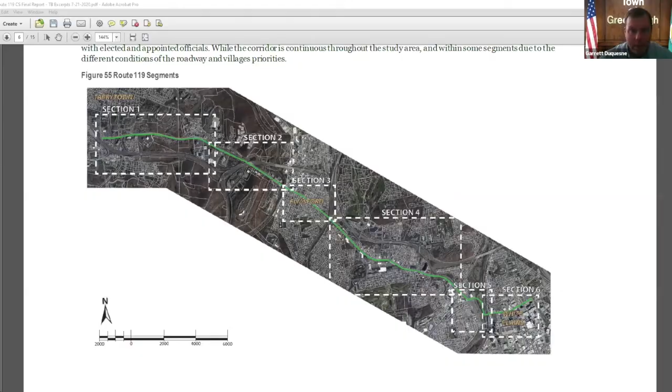Show a photo. As we all know, the Mario Cuomo Bridge—if somebody could just give me a quick shout, do you see the photo here? Oh, you do not see the photo? No, we see the map. There you go. Oh, you almost had it. Yeah, there we go. All right, great, sorry about that.

As we know, the Mario Cuomo Bridge has this fantastic shared pedestrian and bicycle path on the westbound, or northernmost span of the bridge, which brings...

You're still not sharing. Not sharing. I was sharing for a moment and then it came. There on it is. Okay, yep, right. Sorry, I'm trying to juggle a couple things here.

There we go. So as we know, this Mario Cuomo Bridge has this wonderful bike path for pedestrians and bicyclists, and it brings opportunities and challenges. Okay.

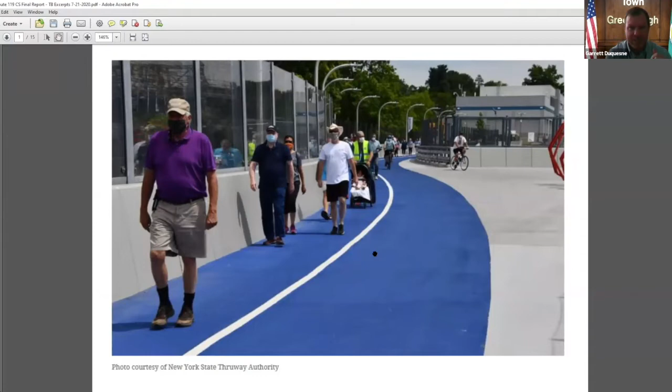That planning was focused on a 5-mile span from Route 9 in the village of Tarrytown all the way through to downtown White Plains, using what's known as a complete street concept. A complete street concept is a street or right-of-way design encompassing all users, including pedestrians, cyclists, users of automobiles, buses, etc. Over the course of 2018 and 2019, a steering committee comprised of residents from each community, including bicycle advocates and municipal officials, oversaw the process.

We oversaw the retention of a consultant named Nelson Nygaard from New York City, and ultimately the Route 119 Complete Street Design Plan was finalized at the end of last year. That report is a 136-page report with collaboration and input from the New York State Department of Transportation, Westchester County Department of Transportation, and the County Planning Department. It's available on our town website, and I'm going to walk us through a little bit of that.

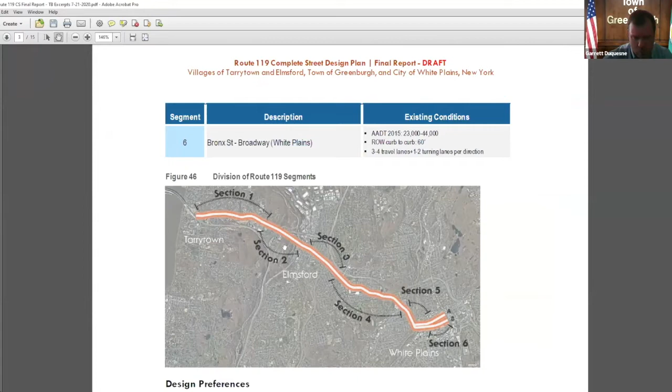We're actually going to focus on the first phase implementation. So let me bring the share screen back. Okay, when I say first phase, I'm talking about what you see on the screen now—sections 1 and 2, which span from Route 9 to the North-South County Trailway in the village of Elmsford.

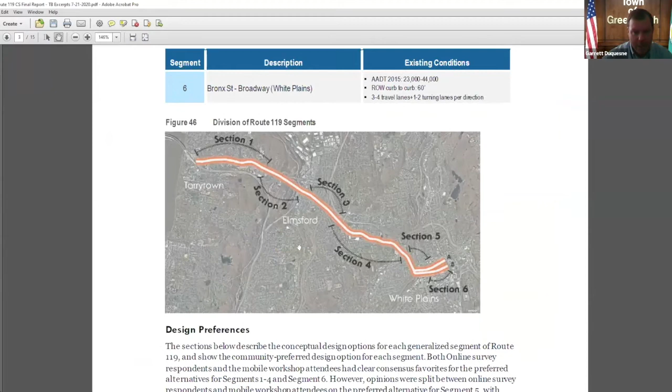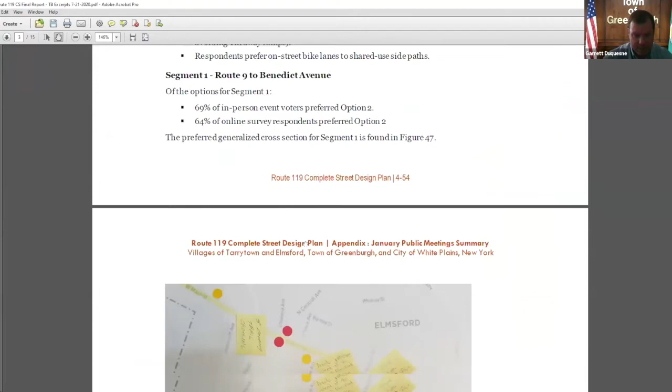In this phase one, what is envisioned is a shared and dedicated bike path on the south side of Route 119. I'm going to show another image of what that would look like.

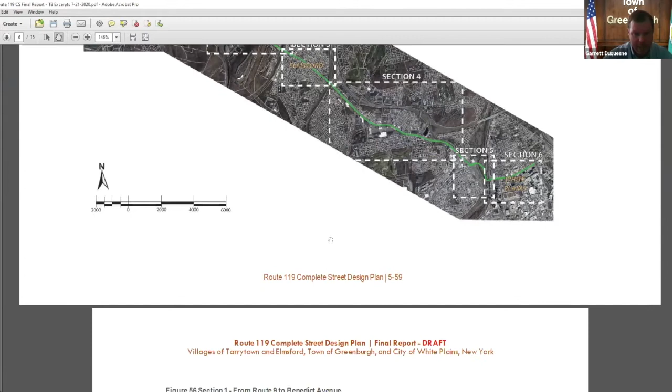What you're seeing now is some of the steering committee work. We held meetings with the consultant, and had the public come in and talk about their experiences on 119—what they liked, what they didn't like, what they thought was safe or unsafe. You see sticky notes here which they put on maps; it was very helpful to gain the public perspective. What was done was a conceptual design, and I want to show you what that means from Route 9 to the North-South County Trailway. I'm going to attempt to zoom in here.

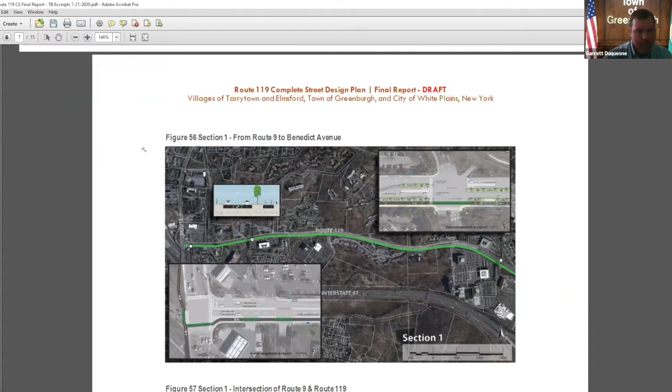What you're going to see are some concept designs of how Route 119 would be reimagined. This would be facilitated by what's called a road diet, which can be done in a variety of ways. In this instance, a lane removal would be required in some capacity, and removing that lane gives you extra space in the right of way to do what I'm about to show you.

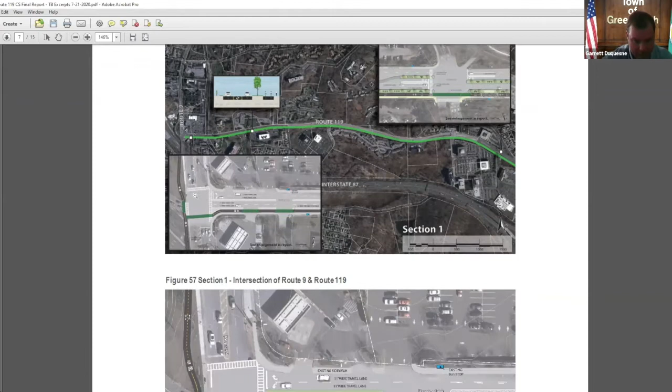As an example, I hope you have your frame of reference here. This intersection is Route 9 in the village of Tarrytown, and this is Route 119. You can see on the left that's the on-ramp to the bridge, and 87 would be down here. In this example, the road diet came into play because there are presently 3 lanes traveling westbound towards Route 9.

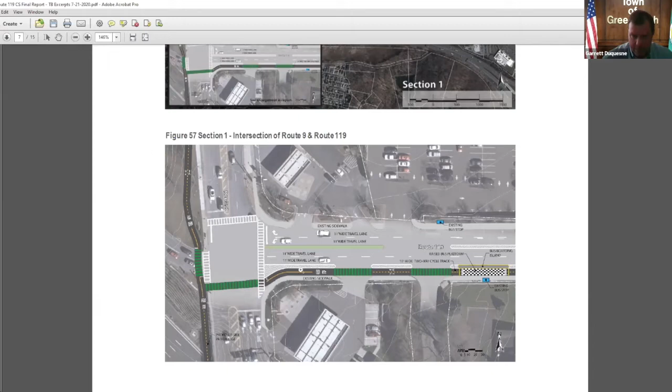The consultant has identified that the traffic capacity is such that 2 lanes would still allow the roads to function fine. What would happen is you pick up the extra space for what you see here. It looks like this cycle track. I'm going to zoom in even a little bit more.

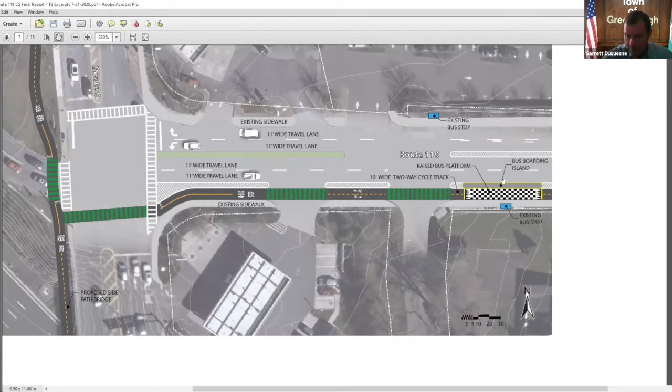You have your dedicated bike lane with 2 directions. Obviously there are driveway impediments, so there are driveway crossings to think about. It also includes a separate sidewalk, but at times it's dedicated, so there would be no interactions with cars traveling on Route 119. It can be separated by bollards, and in other examples there could be landscaping. We also had to think about things like the Westchester County Bee-Line, so there are accommodations for that.

I'm going to continue traveling east towards the town of Greenburgh. The next image is in the town of Greenburgh, close to Benedict Avenue and Route 119. So the frame of reference here would be the Stop and Shop, in the office park in the OB district. This is a continuation of that concept, reimagining Route 119.

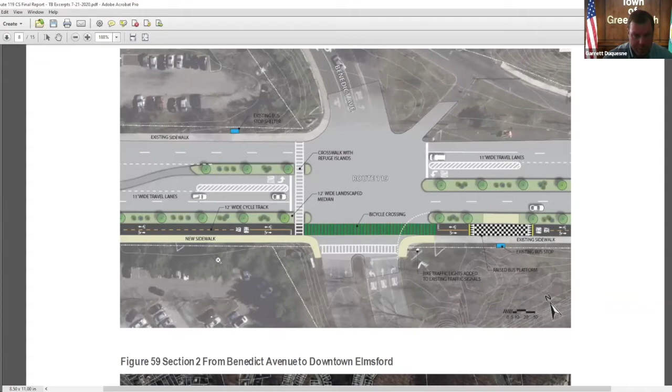If you think about what happens right now, cyclists are out there sharing the road with motorists, and it happens every day. We all hope and pray that happens without incident. But what we are envisioning here is something that would be much safer. You can get an idea of the vision here, and it really would change the flavor of this Route 119 corridor.

I'm going to continue to travel on, and now we're looking at a span of Route 119 at Taxter Road. Same concept here—you've got your bike lane, and you have accommodation for the bus.

I should mention that entailed in this process would be new signalization where you see crossings with intersecting roads. There would have to be highly identifiable light signals so that the bicyclists stop and allow all the traffic to go through. I believe there would be dedicated priority for cyclists to head across intersections, and that would be all part of the design.

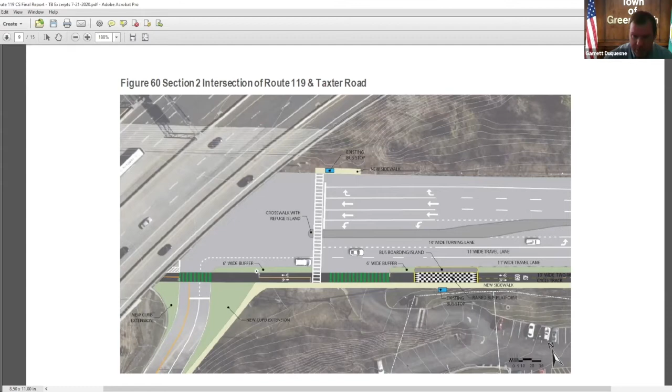Ultimately, this first phase would terminate a little bit west of Route 9A in the village of Elmsford, where the North-South County Trailway runs north-south of Route 119. As we all know, in the last year or two that was connected with a county grant. So you really start to form excellent bicycle infrastructure if something like this was implemented.

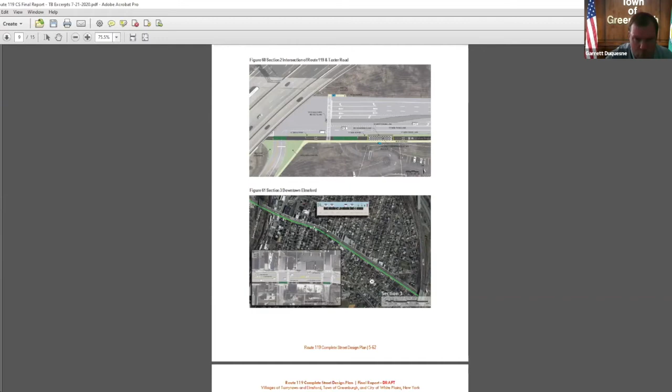So where we're at now is this Route 119 complete street study is finished. What we're seeking to do is gain the intermunicipal support from the 4 municipalities I mentioned—Tarrytown, Elmsford, the town of Greenburgh, and the city of White Plains—to support the next step. The next step is to take this design concept to actual construction plans. What that entails is, again, we would have to hire, and I say we're talking about the 4 municipalities working jointly.

We would retain the services of a surveying and engineering consultant, have the area surveyed so you can have the baseline for construction drawings. You'd have that engineer design all these lanes, design the lights in sync with New York State Department of Transportation. That's a major endeavor.

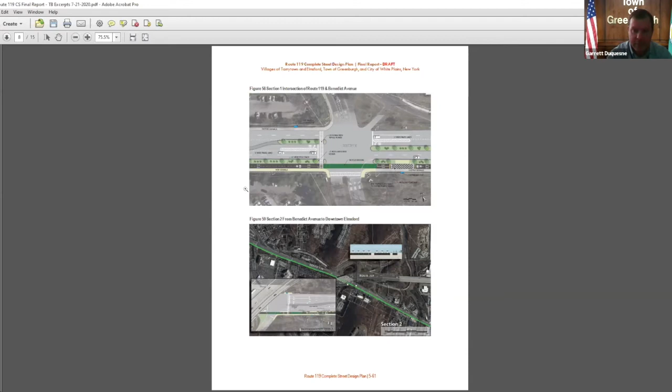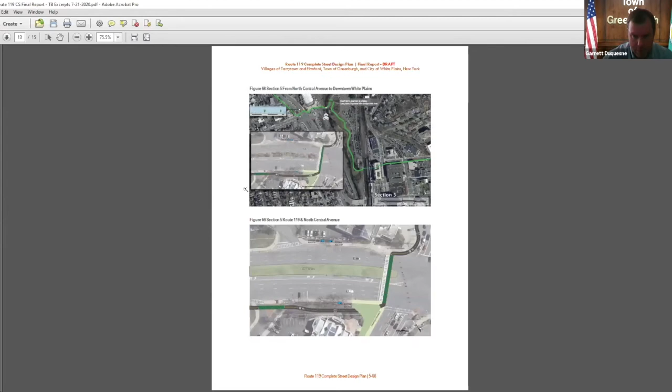Essentially what we would seek to do is obtain $600,000 in funding. I'll show you some of the funding statistics. I'm going to zoom in here.

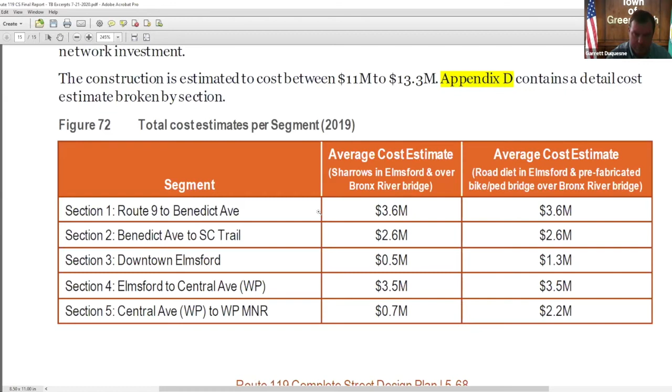Essentially getting the project shovel ready. Shovel ready means all permitting with DOT, going through the local and potentially state SEQR process, or the federal environmental review process, getting this project to where it's shovel ready so that we can then appeal to the state for actual construction funding.

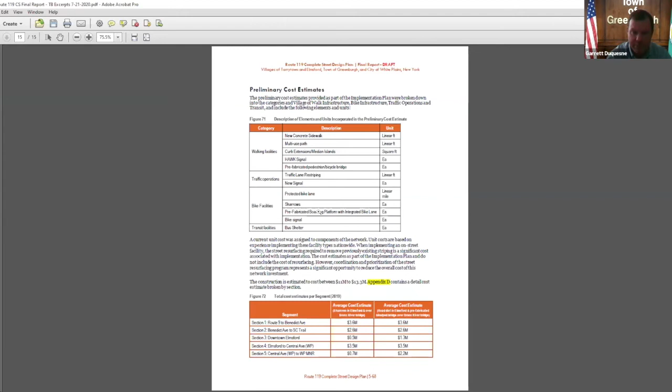The Mario Cuomo Bridge was an over $4 billion investment, so clearly the state really supported infrastructure in the area, specifically bicycle and pedestrian infrastructure. What we see here is an extension of this — intermunicipal coordination and support.

I think it's just a very exciting project, not only for the safety aspect and bringing enjoyment for residents that enjoy cycling, but we also see an economic development component, as we think it would bring more cyclists up Route 119 and potentially to restaurants in the area. So there's a lot of public good that a project like this would do, in my opinion.

I just wanted to make this presentation, and we really do seek the support of the town board via a resolution, ultimately to go ahead and seek that funding from the state.

I just wanted to finish with — we do have the support of the village of Tarrytown and the village of Elmsford. I just received, I believe yesterday, a stamped resolution from the village in support of seeking this funding, and I know Tarrytown's been working with their village board of trustees on the same. So we're still looking to partner here, and I'd be happy to answer any questions if the board has any.

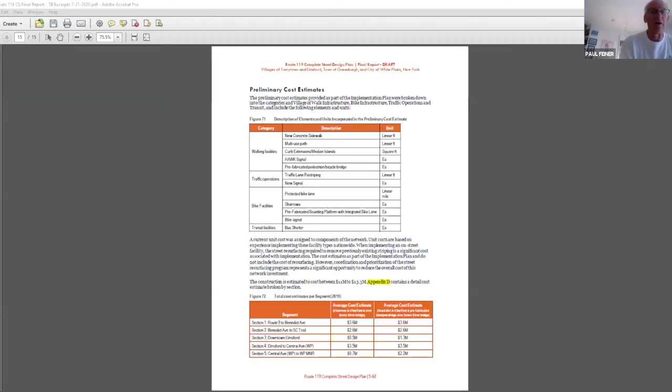One of the things that's really exciting about this is that people would be able to bike from the Bronx line and from the Putnam line all the way to Nyack without seeing a car. I think that would make the Mario Cuomo Bridge bike and pedestrian path so much more exciting, because at one point the governor indicated he wanted a bike path from New York City all the way to Canada. This would enable people to bike from the city using our South and North County trails — it would be an amazing safety enhancement.

I think 119 is definitely dangerous for most bicyclists, and we don't want to see people biking to the bridge and getting injured or losing their life because they were involved in a bicycle accident. Pedestrian, motor, and bicycle safety is very, very important, and this is a major quality of life enhancement.

I'd like to thank Garrett for your hard work. You've been working on this from the beginning, reaching out to other municipalities, and hopefully we'll develop a great coalition that will encourage the state to fund this and make this happen.

Garrett, did you get any support from the city of White Plains? Have you heard from them? Yeah, so White Plains was definitely a supporter throughout the planning process for this Route 119 plan. Their engineer Tom Soik was represented at all meetings, and I actually had a call with him the other day. We are working with the City of White Plains mayor, and I'm going to reach out to the planning commissioner to solicit support. I think it makes the most sense to have all 4 communities on board.

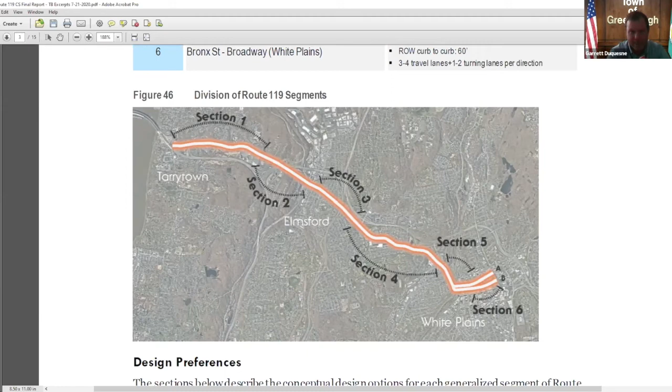Pretty exciting. Maybe we should also reach out to some of the communities along the South County and North County Trail, Putnam County, and some of the communities that people are biking on, because my feeling is, the Bronx Borough President and people in the Bronx want to use the Mario Cuomo Bridge also, or maybe we could get a resolution from the Putnam County executive, because this would make it safe for people in Putnam County to bike to the bridge and enjoy something.

So maybe we could find out which communities are along the trails and write to the local officials. I know it becomes a regional lobbying effort. Yeah, you're absolutely right - Parks and Trails New York, you can't get enough support. So good points, and we will work on that also, broaden our reach, definitely.

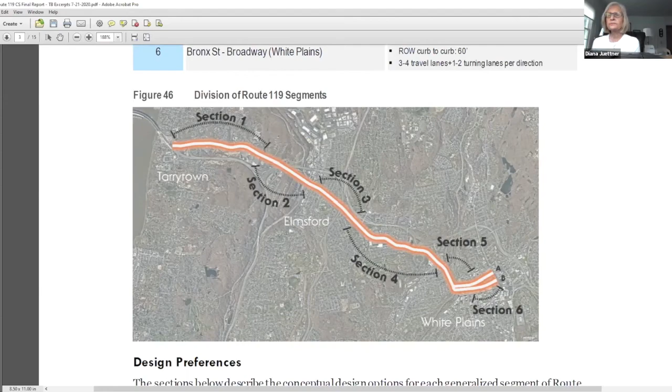Terrific. Garrett, are you still on? Yes, I just want to mention to the board. He hasn't learned to get off right away. I'm good, but I'm not that good.

You just mentioned, give like a 2-minute update on the suggestion with the movie, the drive-in theater, and the concepts that we have. Yeah, absolutely. I think you had mentioned it before, or maybe you'd done over the weekend, a mass email on the G list and got a lot of good feedback. But just to build on that and give an update, the concept that you laid out, which I think is a very interesting one, and other town board members have spoken about it, is to bring arts and entertainment to sort of the outdoor realm via the private sector.

And what you've identified and what we've talked about is, again, the Route 119 corridor. And what you have is the OB district, with a lot of office space, large lots, a lot of acreage, and a lot of parking lot space. So the concept would be really no different than, from what I understand, the very successful drive-in night we had at Anthony Veteran Park last weekend.

Would be bringing that to a different part of the town, but utilizing those underutilized parking areas in the evenings when the offices are dormant, if you will, and seeing if there's an opportunity for the town to update its zoning to be flexible, to allow some limited arts and entertainment in those areas. So definitely something we can continue to explore. I know you sent out the G list email, and we've compiled a list of owners in the OB district. We're going to send letters out to them to see, if zoning laws were changed, would they have interest in doing it?